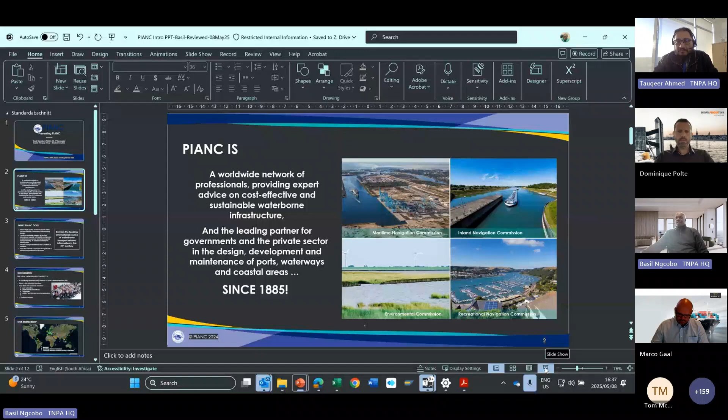There's a slight delay, could just give me a second there. Not a problem. Okay, just to switch that, switch the screens there, Basil. Getting there, Tauqeer. Okay, sure. This machine is not as efficient as it should be. Almost there, no worries. Let me just put my camera. Looks like you need to install a new fender there, Basil. Almost there, just it's coming.

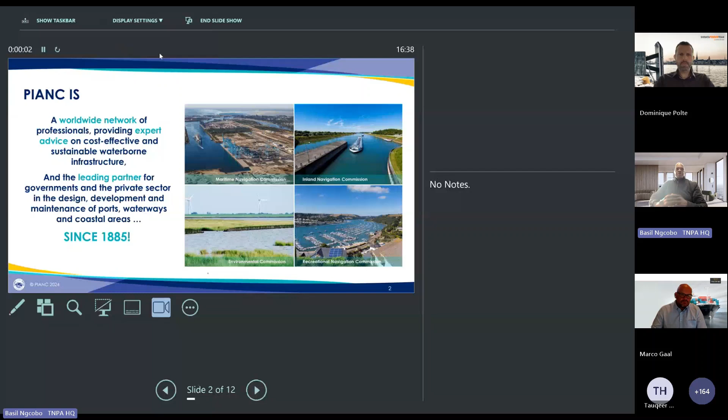All right, Tauqeer, shout if it's good to go. Yeah, okay, now we can see it. You good to go, Basil? It's just stalling on my side. Tauqeer, just give it another second or two. Okay. All right, colleagues, I'm going to start so long, hopefully this is going to catch up as we go along, because really it's stalling right now. I'm not sure, Tauqeer, if we should check the option of maybe projecting from your side, because it's pretty much stalled. Let me try on my side. Okay, just hang on. Okay. The movement is quite slow. All right, let's see. All right, okay, there is some movement. Yeah.

Thank you, you might have to come through. Okay, let me share my screen. Let me know if you can see it, Basil. Yep, I can see it, Tauqeer. Okay, yeah, I can go ahead then.

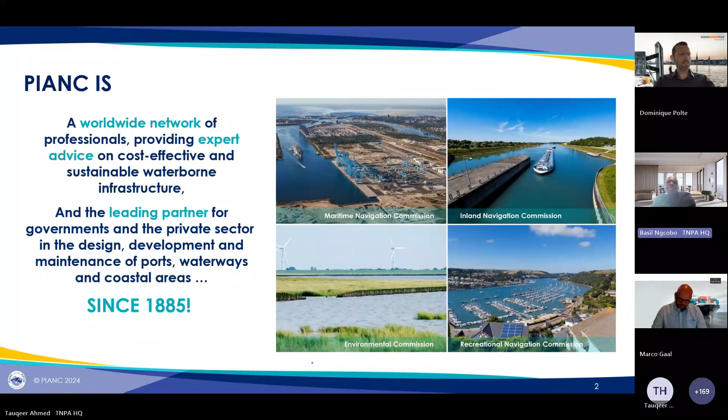So what does PIANC do in essence? They deliver high quality technical reports within the International Commission and working groups. It creates a worldwide network of best international experts, both in public and private sector, on technical, economical, and environmental issues pertaining to waterborne transport. It also supports young professionals and countries in transition - basically aspiring countries that have members but don't have sections. And it keeps the network of experts connected through international, regional, and local events. Let's move on.

So the members of PIANC consist of 43 qualifying members, of which 35 have national sections - we'll explain that now. It has 1,800 individual members and more than 500 corporate members, which includes port authorities, professional associations, universities, and public and private sector organizations. It also has 17 platinum partners, which again we'll explain.

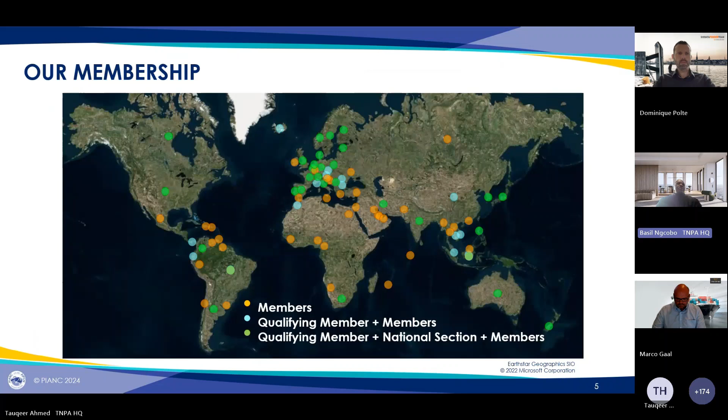Africa still have one national section. We're hoping that in future we'll grow this organization.

So what do you get if you join PIANC? You get connected to experts, guidance, and technical advice, of which today we are navigating some of that work. You gain open access to advanced technological information, address climate change. You team up with decision makers. You become active, if you so choose, on the working groups, commissions and national sections. We bring in the young professional committee or groups into PIANC committee. You become part of that international network.

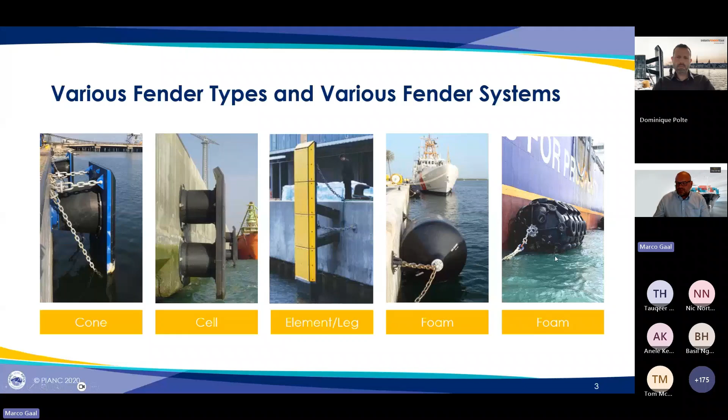And how does a fender work? Very simple. The fender gets compressed, and to compress the fender, that takes a force. The force combined with deflection, as a function, results in the energy.

So we can see two main types of fenders. There's the buckling fender, where you can see the force builds up quite quickly, because it needs to buckle - you need a bit of force to really push this fender into a certain shape, which makes this fender quite energy efficient, a lot of energy with a certain deflection. Then there's another type, cylindrical foam fenders and pneumatic fenders, which we call side-loaded fenders. They don't have that buckling point, so their compression is a little bit more progressive. Here the force versus deflection is almost linear towards the compression, and that gives you the energy.

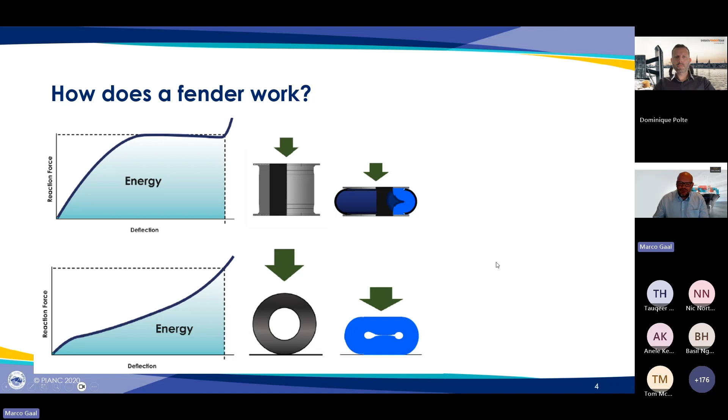So that's in a very short nutshell what a fender is and how it works. I know that's maybe a little bit too much in a snapshot, but for engineers who are new in the business and just getting started with this topic, I'd say just read PIANC 211, chapter 2 - it's an excellent point for getting a little more insight into fenders. So that's to start with. Now the key topic for me in this session is key issues dealing with fenders.

Before we start, I think what you see in modern ports is they face various challenges. One of them is we see an increase in cargo volume. At the same time, ports struggle more and more to grow for various reasons, either budget or spacing, a typical issue you see in a lot of ports in Europe.

Combine that with improved safety awareness, in terms of personal safety, but also port operational safety, and that in combination with congested ports. That's also one of the reasons why you want an efficient port. You can't really afford any downtime. And on top of that, in a lot of ports, more and more also put up tougher environmental regulations.

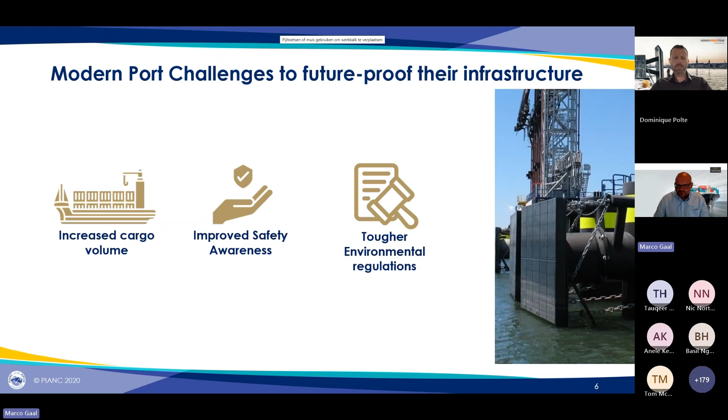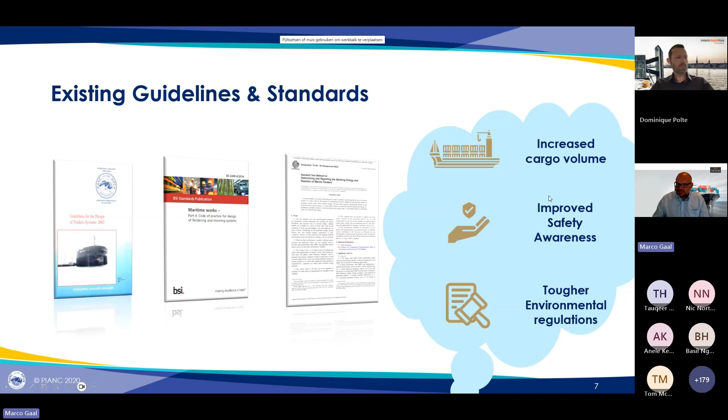Now, if you look at the existing guidelines, there are quite a few, but the main ones are the old PIANC guidelines, the British standard, and there's also a standard for testing. They cover a lot of these aspects. The question is, do they really cover those things that ports require in the future? Are they really addressing points like environmental, the latest safety standards, and so on? I think the conclusion is that they're not.

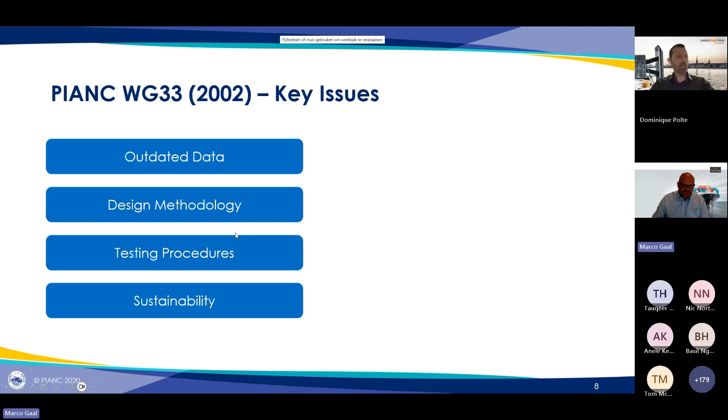But let's zoom into the key issues there. In the old document, we see that there's a lot of outdated data, and I'll zoom into that in more detail. Design methodology is challenging, and I think there needs to be some improvements. Testing procedures might not be really good in the old document, and also sustainability was not covered.

As I said, they don't really align with what a modern port needs. If you look at outdated data, the old document was written in 2002 using data from vessels back then, and back in 2002, vessel sizes were significantly different.

Berthing velocities were based on data from the early 70s, so definitely not really relevant for today's modern shipping. Hull pressure tables were the same style, based on old information, old research.

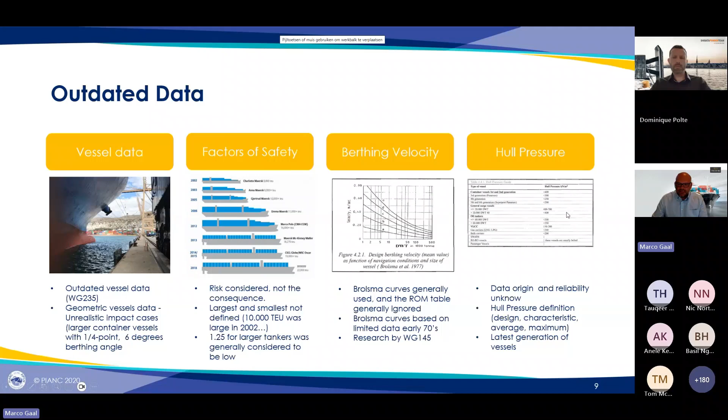If you then look at the design methodology, the old guidelines do not really align with the relevant codes. If you look at Eurocode, ASTM, they speak about characteristic loads, design loads - typically probability-based methods. All the old guidelines do not do such a thing.

If you look at energy calculation, E is still half mv squared. The laws of physics will not change, but some of these insights on the coefficient factors have changed through the years, so that needs to be accommodated.

Performance correction factors - as you probably know, a fender is a rubber product, and a fender has different behavior in very cold temperatures. It becomes more stiff than in hot temperatures, and there are other factors that influence fender performance. The old PIANC guidelines did not really cover that very clearly. Overall fender system design, very important - I think Dominique will speak a little bit more about that too - was not really well addressed in old guidelines.

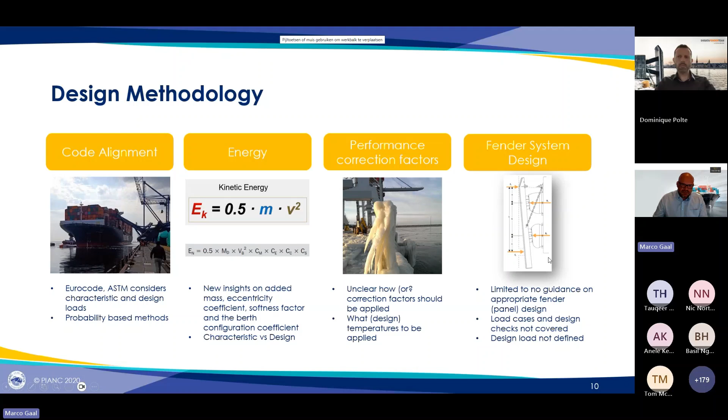That paper showed that 60% of the fenders they tested in an independent laboratory passed requirements - or in other words, 40% of the fenders had testing issues, either fenders not complying or the testing guidelines being misunderstood. So clearly something needs to be done.

The old guidelines' procedures were not clear. There were issues relating to traceability of the fender. So if you produce a fender and test a compound, how can you be sure that high quality compound is actually used in your fender, and how can you be sure that's the compound used for your published catalog value?

So all of that needs to be interlinked. Old guidelines had no requirements on physical properties, or very limited, so the new guidelines introduced that in greater depth.

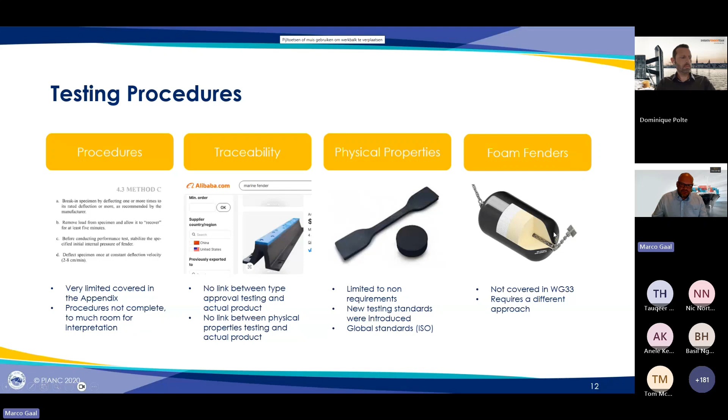In the old guidelines, also foam fenders were not really well addressed.

And sustainability, it's quite obvious how that evolved in the last few years, whereas when the PIANC guidelines were published in 2002, clearly that was not a main topic. So obviously the world has changed in the mindset, including the development of the United Nations sustainability goals.

PIANC made this a key task in their organization, and that's why we see this coming back in papers, in reports like the fenders. At the same time, the industry has various challenges to do.

Rubber is hard to recycle. The use of recycled rubber is therefore a challenge - rubber is difficult to recycle, but also use of recycled rubber is still a challenge in the industry, and will be a challenge for many years to come.

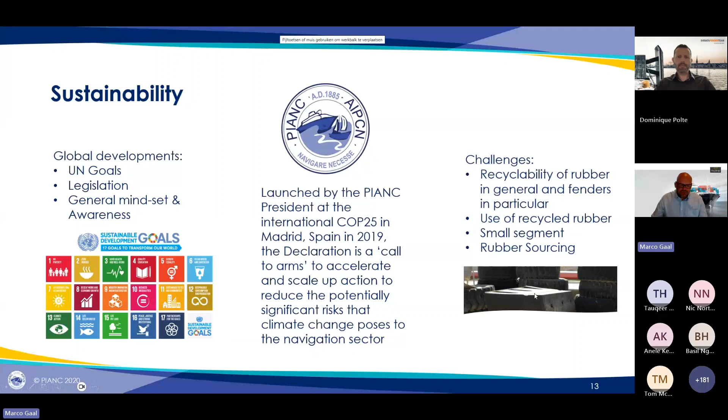But also looking at small segment rubber fenders, which doesn't make it very interesting for the recycling industry to invest in. Rubber sourcing is challenging too, because it's partly a synthetic product. So lots of challenges there too that needs to be addressed.

So that's in a very short, quick introduction on the key challenges that we see with the old guidelines.

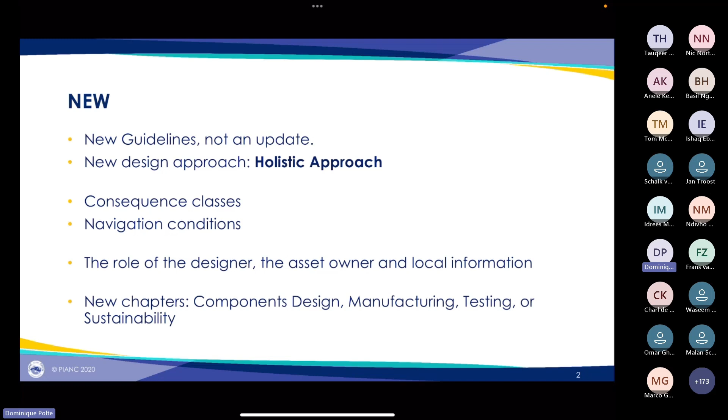We have dedicated chapters for component design, manufacturing, testing, and sustainability. Before, testing was just an appendix of the old guidelines, and we put all the important topics into different chapters to make sure they're all addressed correctly, because the design is so important for the life cycle and operation of the fender system, and the new guidelines address that pretty much.

So local information is key. If you don't have the local information, it leads to quite conservative designs with the new guidelines. Be aware that from a general point of view, the fender system will rather get bigger than smaller, unless you have detailed data in terms of berthing speeds, bow radius, the variety of ships, and multiple fender contact. Otherwise you end up with larger fenders, so make sure your database is correct and is not leading to too conservative designs.

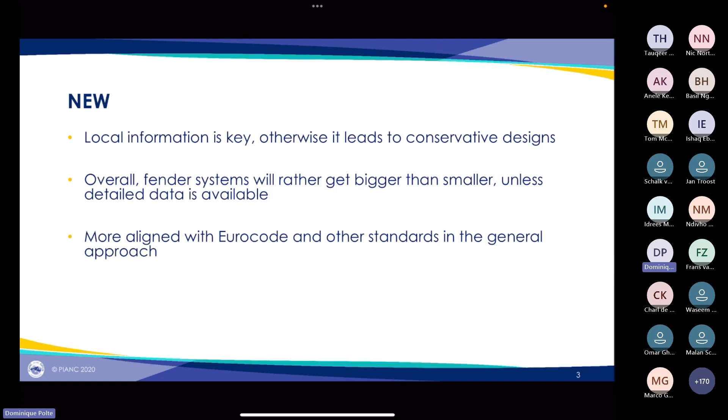The general approach is more aligned to Eurocodes and other building standards, with a probabilistic approach. So if you're familiar with Eurocode or other standards which are probability based, it will be easier to get into these guidelines. Next to PIANC, there's also the British standard, 6349, which is being updated.

Especially in English-speaking or British-educated countries, the British standard is pretty dominant, and you have to be careful if you mix standards—this happens in specifications, where you can't cherry pick, using the advantage of PIANC and the good thing of the British standard. That doesn't work, it's not mix and match. You have to decide which way to go as a design basis, because they have differences and the outcome could be quite different if you try to mix or combine them.

Finally, for existing structures, the new guidelines have to be modified, because the design approach is based on new structures. For existing structures, you might have to modify your approach in terms of correction factors, safety factors, and so on, because you can't change your substructure. If you calculate your fender system and certain forces that need to anchor into the substructure, for an existing structure you can't really upgrade it.

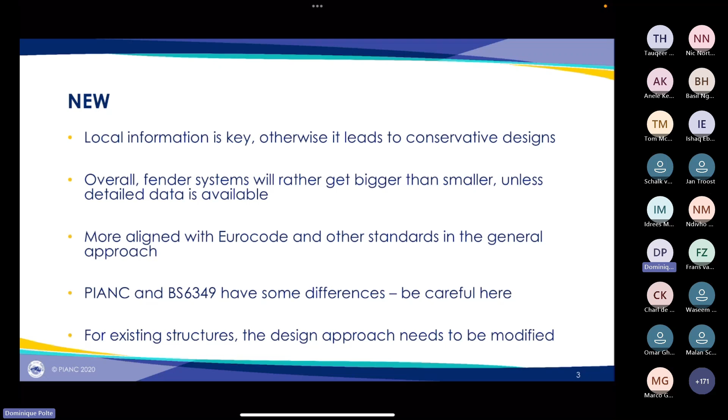With that, we are getting into fender system design and selection, and I'll get into these new aspects a little down the road. We start with an overview of the typical fender problems we're seeing in the market, what you might have seen, and then discuss how the new guidelines address these problems.

Leading the way into new guidelines, with the typical problems we saw in the market, now being addressed with the new guidelines, which is a big step forward. These guidelines are a massive improvement, but it's very important to use them correctly and to use the right data.

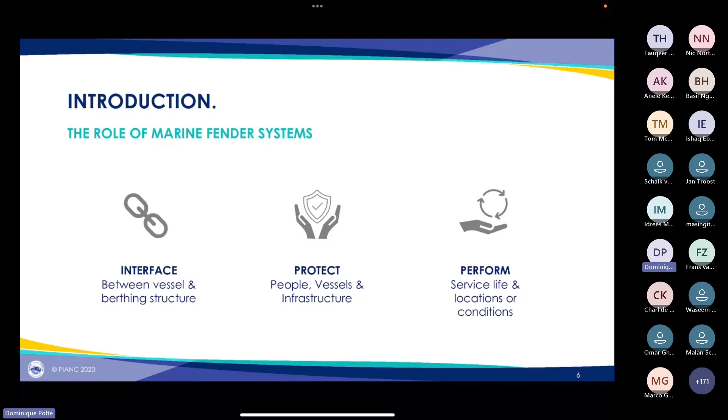In general, the role of a fender system—we addressed it already a little bit—is the interface between the vessel and the berthing structure. It should protect vessel structures and people, and you want to make sure the fender system performs over the life cycle. That doesn't mean a fender system cannot fail, so that's something to be aware of.

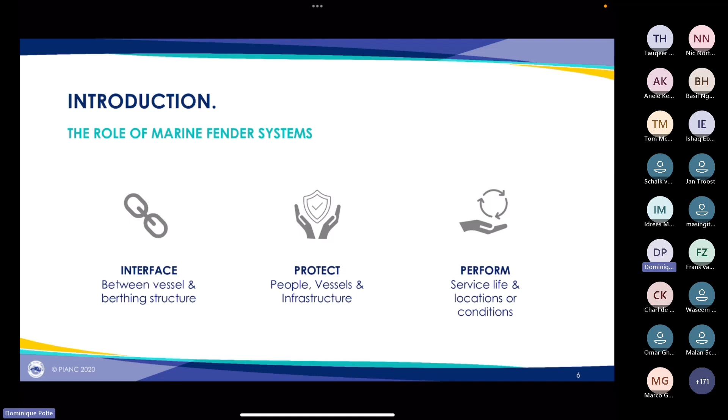If a ship comes in at a higher speed or whatever, and the fender system fails or breaks, but the ship is fine and the substructure is fine, then the fender did its job. A fender is also kind of a fuse—you want to make sure the ship and people on it are fine, the substructure is fine, and the fender failing is absolutely fine. There's no problem with that, because it's safety equipment, and it should avoid more damage if a vessel comes in under uncontrolled conditions, higher speeds, and so forth.

So what are the typical problems of a fender system? We have a sole focus on the rubber unit only.

That's a problem, because a lot of specifications focus on the rubber and talk a lot about testing and these kinds of things, but not addressing load cases, positioning of the rubber unit, chain angles, and so on. Just the positioning of the rubber unit on the panel makes a huge difference for the performance of the fender system and also the life cycle.

This whole fender design is not rocket science, but there are certain very simple things that make or break a fender system. The same with the weight chains. If you have incorrect weight chain designs with incorrect angles, your fender system is going to fail just because of design issues. And the same applies to the steel panel.

If your steel panel is not designed for the right load cases, the fender system can fail, or the life cycle is reduced substantially. This is what we call the holistic approach, which was also adopted by PIANC, because you have to look at the fender system as a whole, not only the fender - you have to look beyond the fender. The substructure is also important, because if you need certain chain angles and there's no substructure to anchor these chains, then you have a problem.

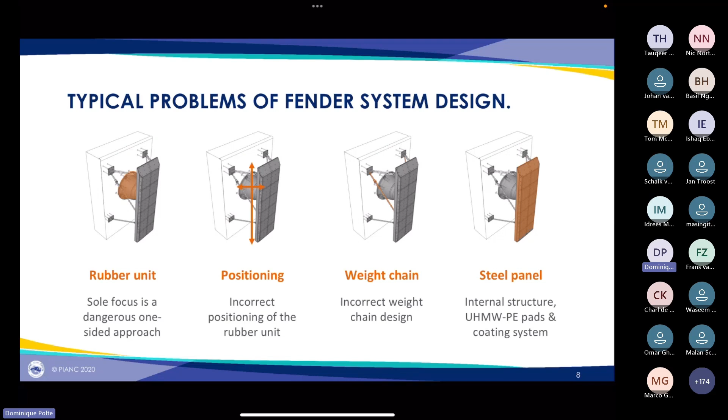Just a couple of examples here. In this project, the positioning of the rubber unit is a problem. You can see that the panel is already tilting under its own weight. The weight chain has slack and also has the wrong angle.

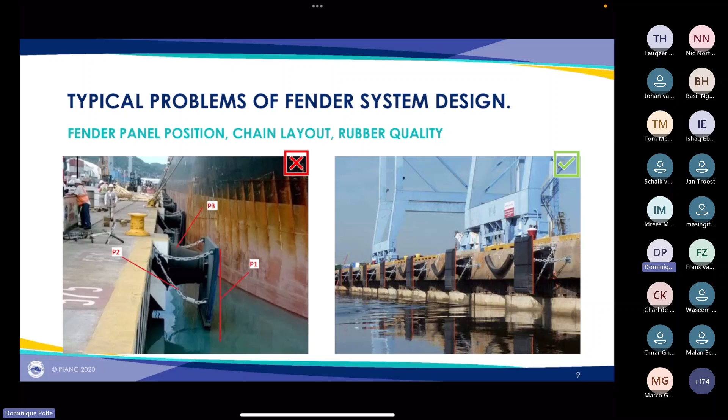If you look at that system on a drawing, it might look fine to the untrained eye. But later, once the system is in operation, you see all these problems. Compare that to a well-designed system with the correct chain angles and positioning of the rubber units in the center of the panel, and so forth. The same applies to the internals.

If you have a steel panel which is not designed correctly for the load cases, you will end up with a bent or destroyed panel. So you want to make sure that your steel panel is designed correctly to be able to deal with the loads and load cases applied to the fender system over its lifetime.

And then, of course, there's the design approach where you look at fender systems in service for like 6 months and they are failing, compared to systems in operation for 10 years that are absolutely fine under very similar conditions. Those are design issues, because the initial fender, like on the left side, is a great quality product. But the design and the application is the problem.

So that's what I said earlier - you can have the best rubber unit or the best fender, but if your design is wrong, or not all of the requirements are considered, fender systems are failing. And so therefore it's so important to consider all these aspects.

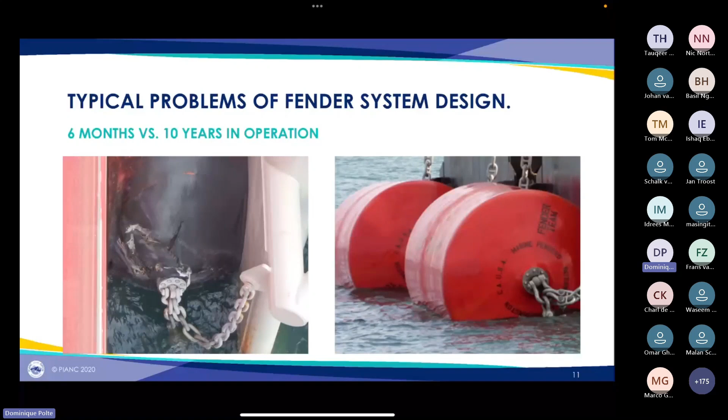The same applies with installation of fenders where you have conical fenders. Sometimes they're installed inverted. Now the new PIANC addresses that issue and makes clear that there is only one standard orientation, which is installing the fender with the wide flange to the substructure.

Because if you invert the fender, you have a much larger cantilever, you have higher stresses in a smaller area, and the typical failure mode is cracks in the head section of the rubber unit. This is something we see on a regular basis, and it's something to avoid, to make sure this is addressed so you don't have these issues down the road.

And therefore, the new PIANC is also addressing that, educating people on what the standard orientation is.

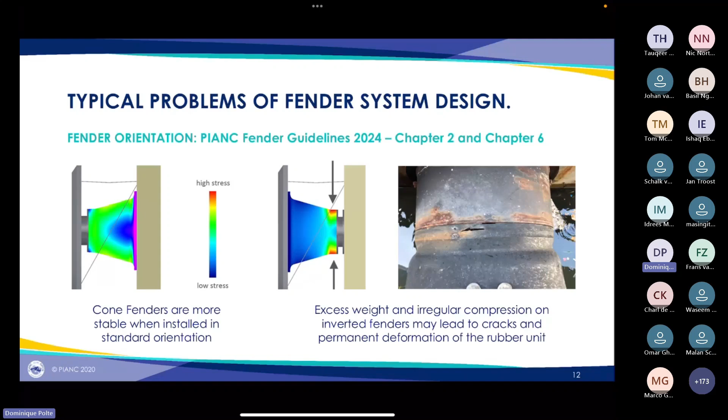And that's not what a fender is designed for. So the fender is failing. There's no other way that the fender will withstand these forces. So it's a good example that you can have a high quality product that could fail just because of design issues, because these cyclic loads were present and not considered in the design of the fender system, and then fenders are failing.

So therefore, we have chapter 7 addressing these issues, and the goal with cyclic loads is to reduce the deflection of the fender to like 5 to 10%. And that makes a huge difference.

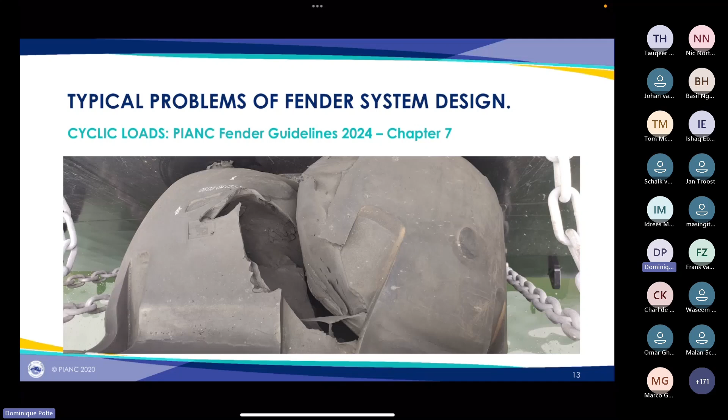This fender, as I said, was deflected to the maximum several times during minutes, and they're just not designed for that. So when it comes to cyclic loads, you have to pay even more attention to what is important and what needs to be addressed in the design of the fender systems. As I said, the guideline says you want to limit your deflection to like 5 to 10%. This fender was deflected 70%, several times per minute.

So all of that is to avoid costly consequences, and you want to make sure that you look at the project conditions, the components, and their design and manufacturing, because only all of that together combined provides you a reliable fender system, really following the holistic approach, which is recognized by PIANC and the new guidelines.

So in terms of the project conditions, as I mentioned earlier, there's so much more than just a rubber unit. There are different rubber units you can use, because the most efficient fender might not be the most suitable fender. And that's something we see on a regular basis, that you might use a less efficient fender, but it's most suitable for your application.

You have to look into your location, the materials, the vessels, and so forth, to make sure you have this holistic approach and really address all the different project conditions.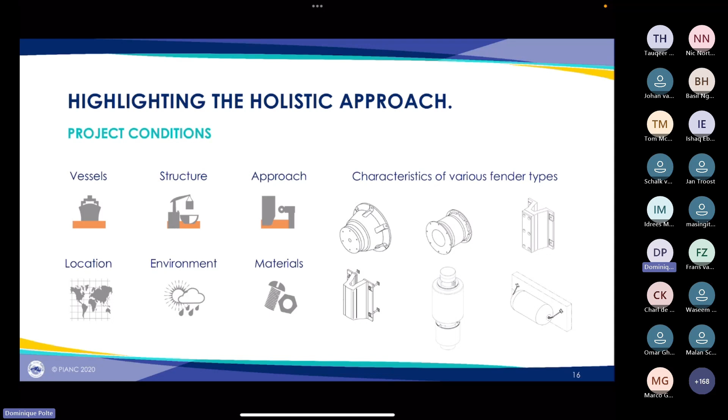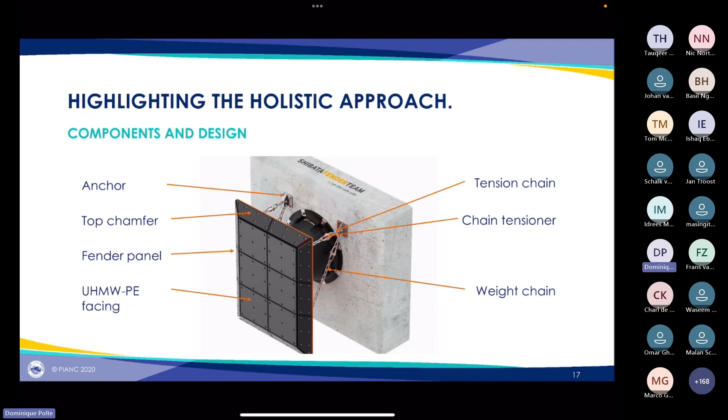When it comes to the components and the designs, we addressed that already a little bit. This is just an overview of all the different components of a fender design and a fender system. And all of these have to be designed correctly and in connection and cooperation with each other, because otherwise they don't work.

And then also the manufacturing. You want to make sure you have a high quality product with high quality raw materials. However, as I said before, a high quality rubber unit doesn't make a good fender system, and vice versa. You can have a high quality rubber unit with a bad design, and the fender is failing. You can have a low quality fender system with a good design, and the fender is also failing. So focusing on certain components alone will guide you in the wrong direction.

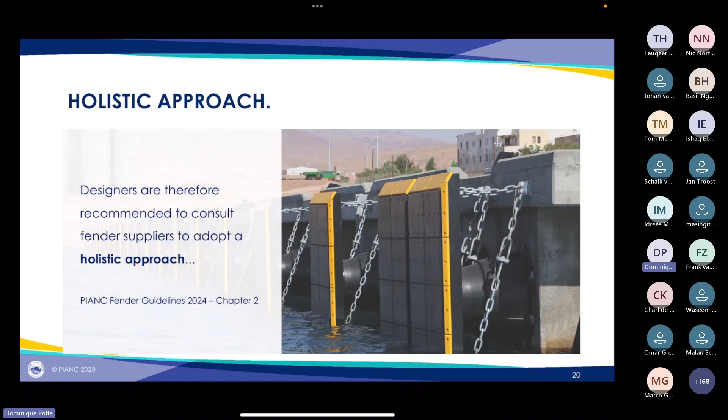So how are the new guidelines addressing this? In chapter 2, they used the word holistic approach. We've been advocating for that for years now, using a holistic approach, and PIANC recognized that. Looking at chapters 5 and 6, those are almost the most important chapters for designers, because in chapter 5 the berthing energy is discussed and shown, and how to calculate it, and then in chapter 6, the fender design and selection. So they are really key chapters. The other chapters are important aspects and support chapters, but your work really starts in chapter 5 and 6.

What I mentioned earlier, the new part is the navigation conditions. So you look at your terminal and your port, and then you have to decide, based on this table, what are the navigation conditions: favorable, unfavorable, or moderate conditions? And that's something only the designer and the asset owner can decide. The fender manufacturer, they don't know, because you know your port best, and the decision about navigation conditions could also change within your port.

So if you have a port at the mouth of a river, the most exposed terminals might have very different navigation conditions than those further inland or upstream. So also within a port, things can change: navigation conditions, and also consequence classes, which is in chapter 4, change by port, by terminal, and also by what kind of vessel you have, and all these kinds of things.

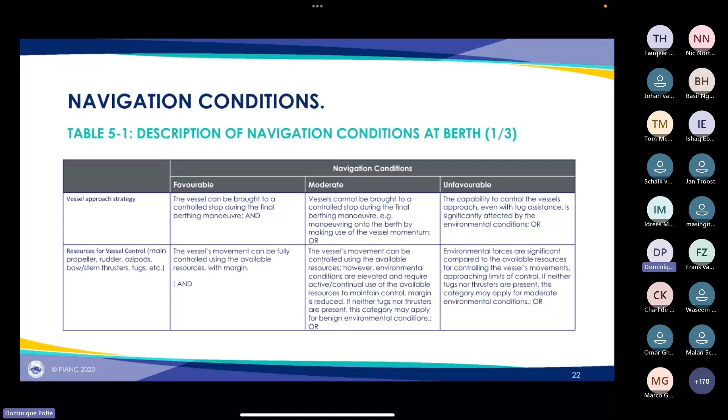There are several aspects being addressed, also currents and waves. So everything has to be considered, and then make a well-educated guess or decision about the navigation conditions, and then from there you proceed along the design flow in order to address each component and also each aspect of the design.

If we look at the kinetic energy, the general approach hasn't really changed. We still have the laws of physics here with half the mass times velocity squared. In the new guidelines, we took out two factors, the softness factor and the berth configuration factor, because we realize the impact is very, very low, and in addition, in almost all designs, designers determine these factors to be 1.

So we took them out, and instead of the abnormal berthing factor or the safety factor, we added the partial energy factor. So the partial energy factor is the new safety factor, and with it you can really fine-tune your safety factor for your particular terminal range of vessels and so forth. However, the berthing velocity is still the dominant parameter.

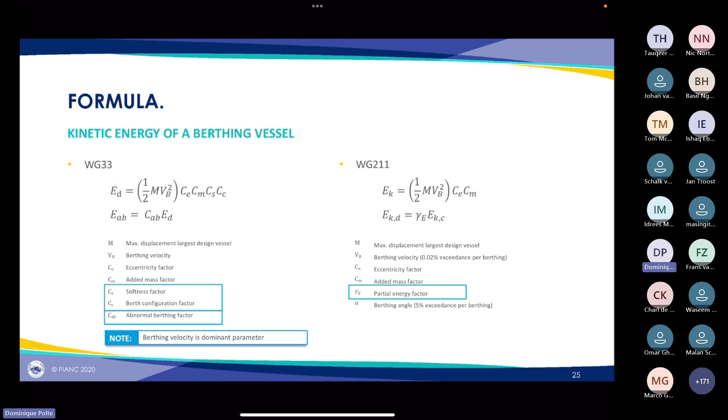And that's why determining berthing velocity is so important. If you have the local data, use them. If you don't, and we also recognize the real world, because in the majority of ports, I would say 90+%, they don't know what the berthing velocity is. So what I mentioned earlier, if you have local data, use them as much as you can. But if you don't have the data, on the one hand, you have these tables here.

With guidelines on the velocity. What you also could do is, if you have an existing terminal which is designed on, let's say, 100 millimeters per second, and that works fine, then there's no need to increase the speed, because then experience also becomes local knowledge. Even if you don't know the exact speed of your vessels, you still know that with that assumption, everything works fine, so we just continue with that.

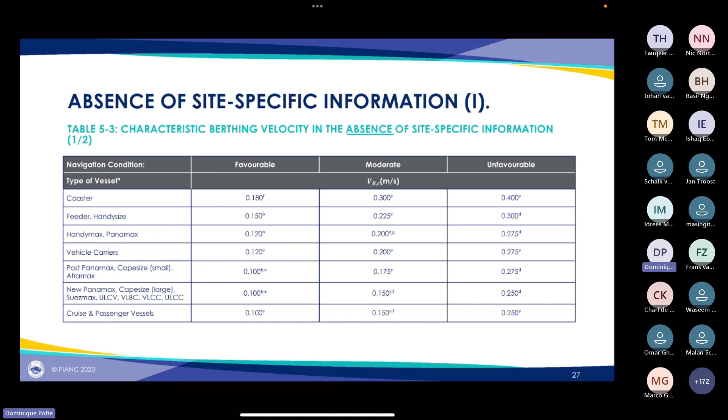Here in the table, you can also see why the navigation conditions are important, because changing from favorable to unfavorable could double your berthing speed used for your design, which has a massive impact on the fender and fender size down the road.

Couple of highlights here. The berthing velocity has to be provided by the asset owner, because nobody else knows except the asset owner or the port. The minimum berthing velocity is 0.1. Before it was 0.08, so you already have like a 20% increase in berthing velocity here, which might make the fender bigger in the end.

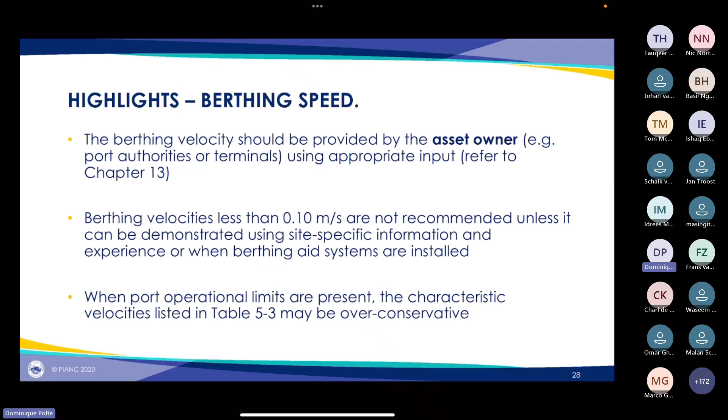And then, of course, if you have certain operational limits, the velocity in the table might be too conservative. So again, if you have local data, use that.

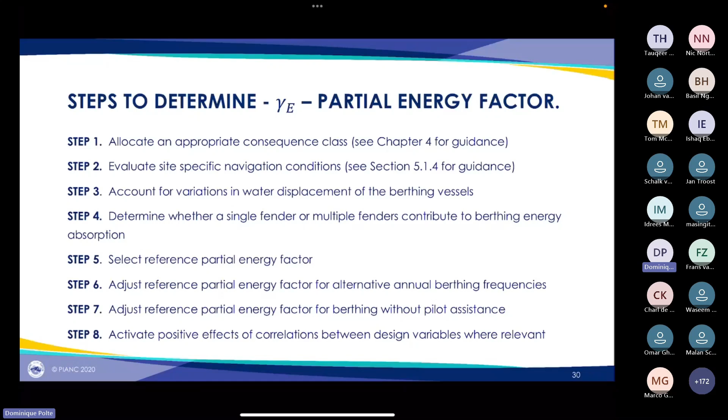When it comes to the partial safety factor, that accounts for uncertainty in the berthing energy, and there are fine-tuning options to correct for annual berthing frequency, pilot assistance, variation in the design or design displacement, and so forth. So there are 8 steps, and I don't want to get into all of them because we're running a little bit of time here, but you get 8 steps basically to follow in the guidelines in order to determine your partial energy factor and fine-tune that factor to your particular project.

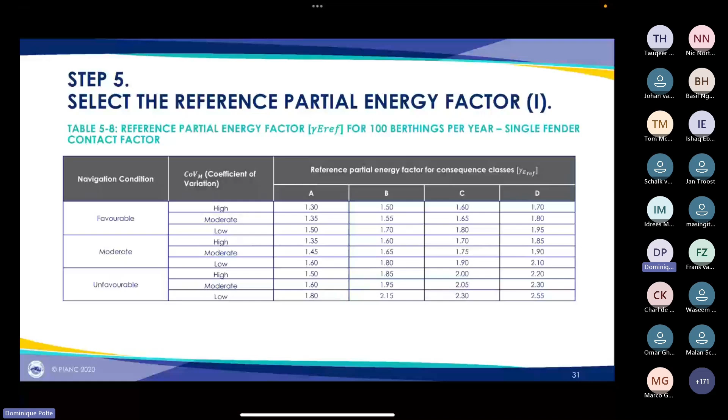Then for this partial energy factor, we got a table here where we can also see the impact again of the navigation conditions and the consequence classes. So we have consequence class A, B, C, and D, and the navigation conditions, and the combination of that. You can also see that the velocity, the correction factor, and the safety factor changes substantially within these consequence classes and navigation conditions.

If we apply the new guidelines in 211 and the minimum speed of the new guidelines, we are already at 2,500, so we have another increase of 20+% on the berthing energy. And if we apply the new guidelines with reduced speed, with the speed we used before, then we had like 1,600, which is again about 1,000 kilonewton meter less. But this shows the impact of berthing velocity. It has a massive impact on your results, and therefore it's so important to make sure your berthing velocity is right and you use the right data.

Quick conclusion: we require more input, or the designer requires more input, to prepare an energy calculation based on the new guidelines, and much more. We need to allocate more time than in the previous working groups or previous guidelines. We can consider multiple fender contact to reduce design energy, but you need a lot of data to do that, and site-specific information is really needed, getting them from the asset owner, who has to be involved from day one.

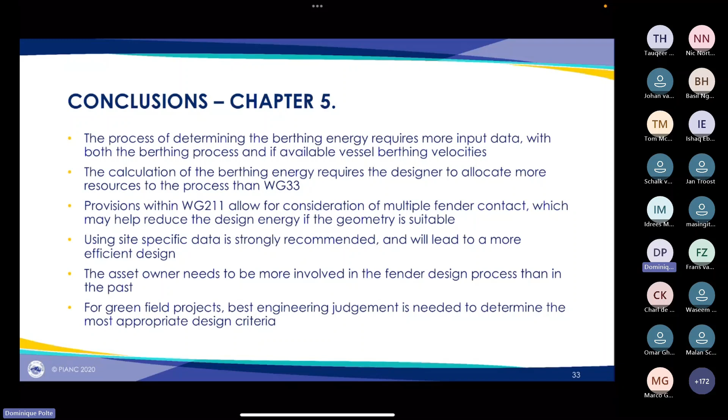And for greenfield projects, use your best engineering judgment. That's what it is there. Chapter 6, pretty quick here, about timing.

The old working group had certain terms being used, like CV values. This is now the base performance. The CV values plus correction factors is the characteristic performance, and the abnormal energy is now the design performance, and the RPD is now preset conditions. So this is also something to consider for specifications, that the terms have also changed and need to be updated accordingly.

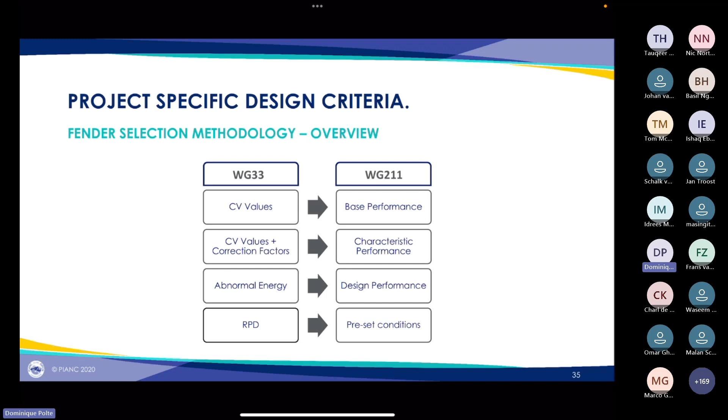What we introduced are the preset conditions, because if you don't have enough data, you could also design a fender system with the preset conditions. In the manufacturer's catalogs, there will be two tables, one for the base performance and one for the preset conditions. And with these preset conditions, you cover 90% of projects.

Because the temperature ranges are covered, the angles are covered, the speeds, that puts you on the right track there. If you don't have data, you can use these preset conditions and preset values for a relatively safe and conservative approach.

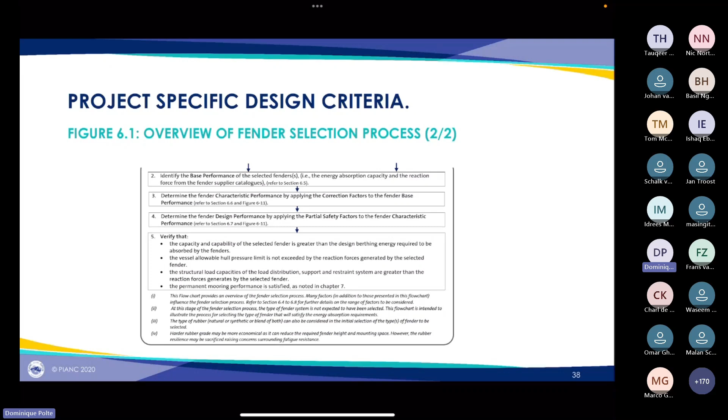So the overall selection process, as we said before, you have to look at all your different conditions: site conditions, operational conditions, berthing speeds, rubber grades, average temperatures—all these kinds of things you have to consider, and that goes into the selection process. We will see that in one of the next overviews here, which gives a clearer picture.

So the factors influencing the fender system: the bow radius, bow flare, vessel belting, do I have flexible dolphins, how many fenders do I have, is it ship-to-ship fendering? There's so much that goes into that, which we already mentioned before.

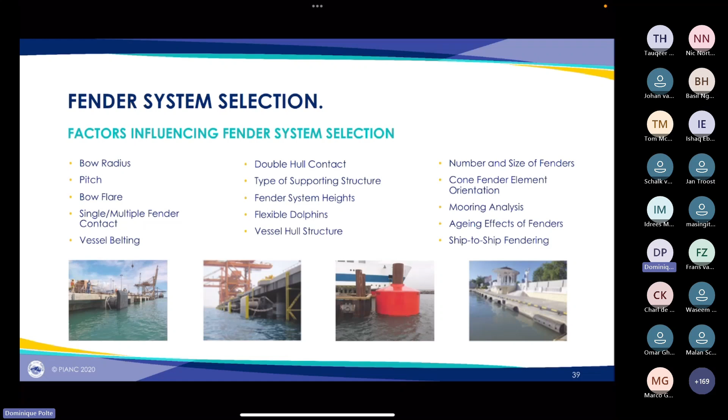So in the selection process, basically what you do is, based on your berthing energy, you select an initial fender and apply the correction factors for velocity, temperature, angle, multiple fender contact. All of these are applied accordingly. That gets you the characteristic energy. Then further, to the characteristic energy you add your safety factors, and then you get to your design energy—we get to that in a second here.

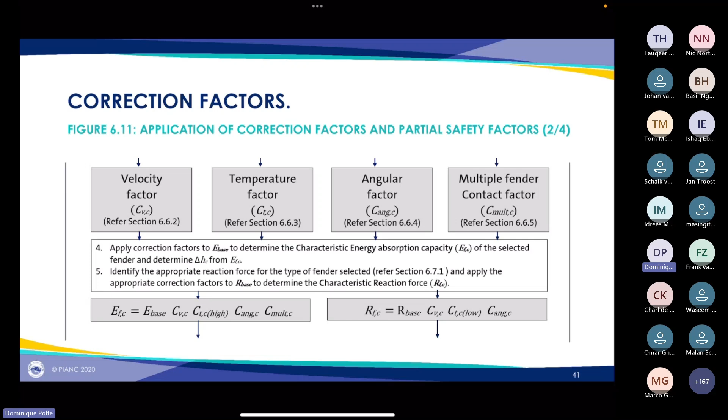Just want to give you a brief reminder about velocity correction factors. We have the velocity factor: basically rubber is a viscoelastic material, so if you compress it faster, it's stiffer. That's why you have to bump up the performance curve here with these velocity factors.

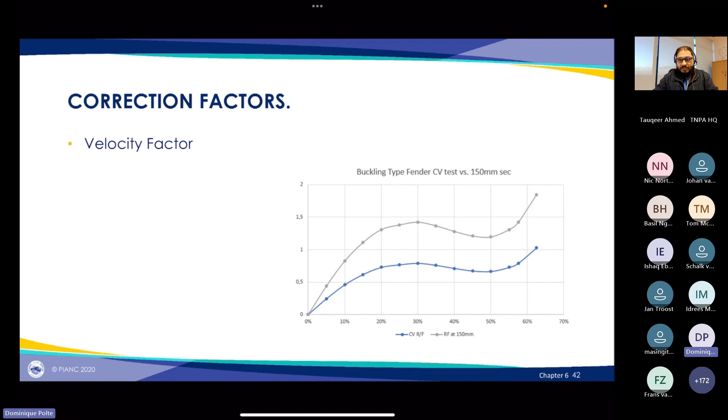The temperature factor: the fender behaves differently in cold or warm climates. And the angular factor is basically looking at the center line deflection. If your center line deflection is not 100%, you don't get 100% of the energy. That means less energy under angular compression.

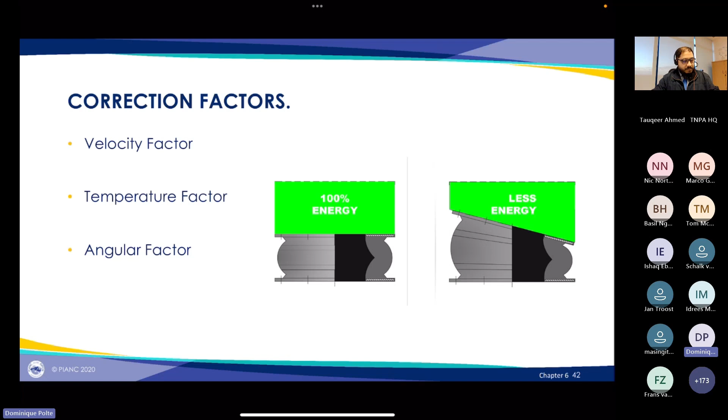And then the multiple fender contact: if you contact multiple fenders, then of course your energy is spread over more than one fender, which could also reduce the size of the fenders. But you have to make sure you have all your vessel data and everything to determine if that case is really happening and how much energy the adjacent fender will provide.

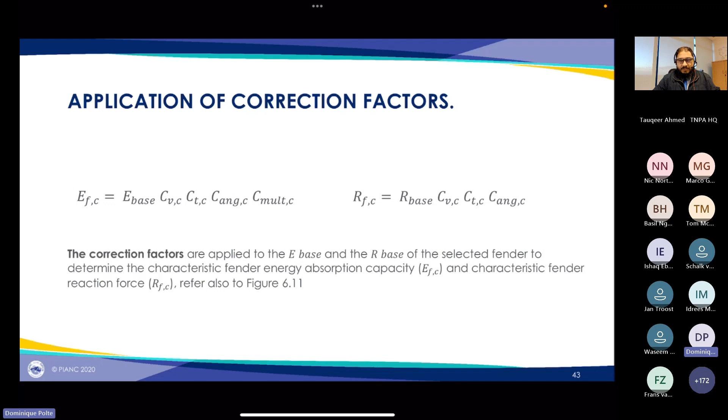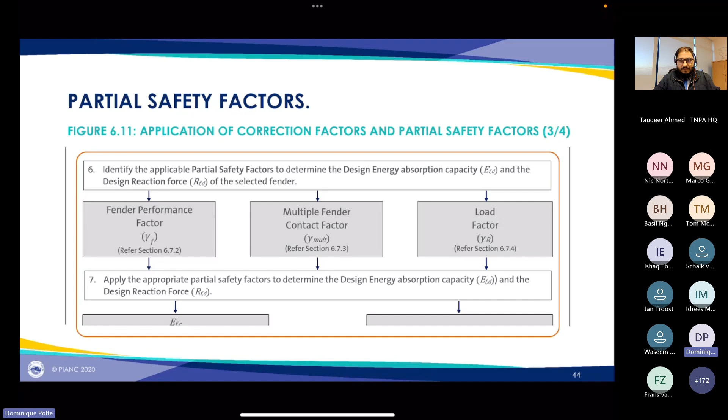So after doing all of that, you apply these correction factors to the base performance, and you get your characteristic energy absorption. The next step is to get from the characteristic to the design energy: you apply your partial safety factors, which is the fender performance factor—that's basically the tolerance—multiple fender contact, if more than one fender is in contact with the vessel, and the load factor that's applied on the panel side. So applying that as a safety factor determines the size of the panel, the hull pressure, the chains, and so forth. This is something also new in the new guidelines, this load factor on the panel.

And also in combination with the consequence class, so if you decide for consequence class B, you have 40% more load, right there, compared to the old guidelines. That's why I said in the beginning, overall fender systems are rather getting bigger than smaller.

So, based on that, you get your design reaction force and your design energy. The design reaction force has to be less than the load capacity of the panel, and on the energy side, your design energy has to be more than the kinetic energy of the vessel to make sure your fender is designed correctly.

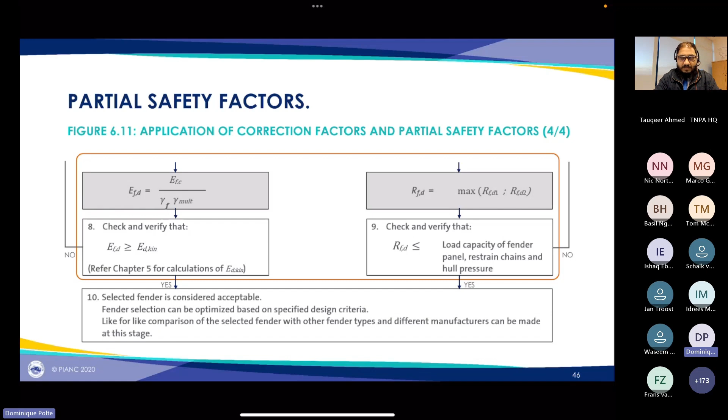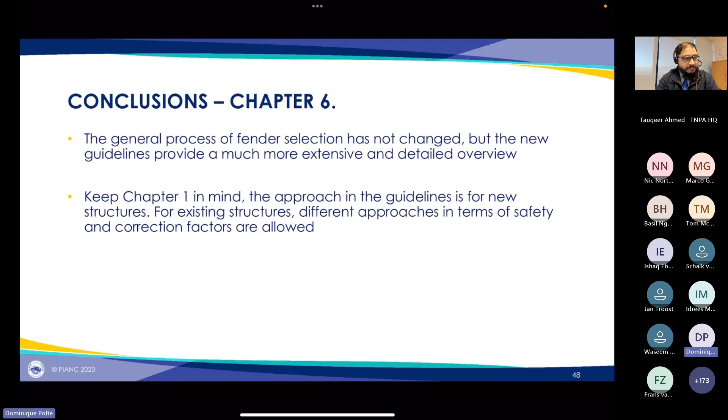That's just an overview about the different formulas, but let me skip to the end here time-wise. So the general process hasn't really changed, but the approach needs more time and more detailed information. In chapter 1, as I said before, the guidelines are for new structures, for existing structures you may need a different approach. The preset conditions provide a good start and cover most jobs worldwide if you don't have data.

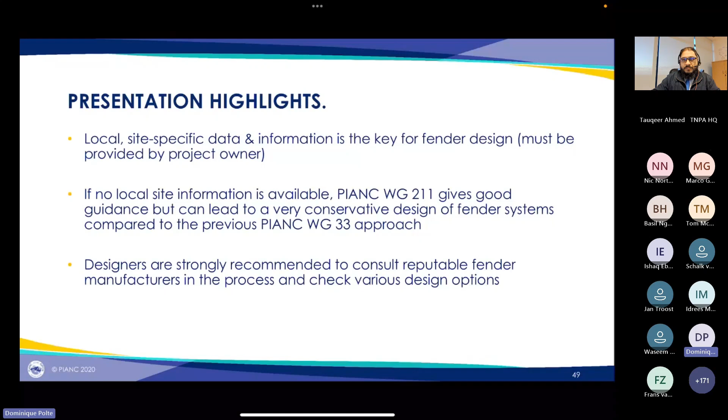The local data and information is really key for the fender design. If you don't have data, you might get too conservative designs—that's also something to keep in mind. Designers are strongly recommended to talk to fender manufacturers, supporting them in their design process. But on the other hand, the designer and asset owner have to provide the needed information, applying a holistic approach.

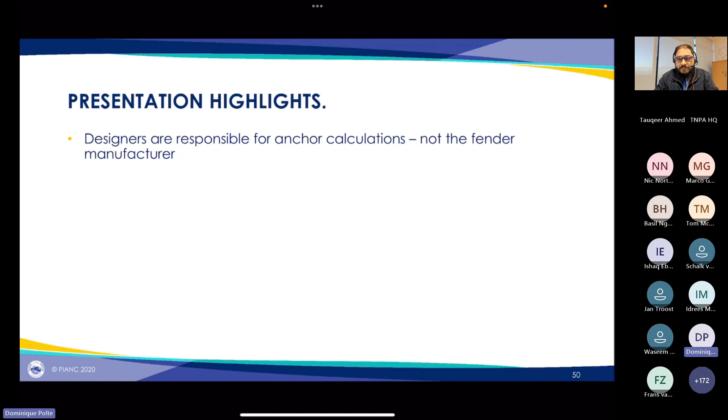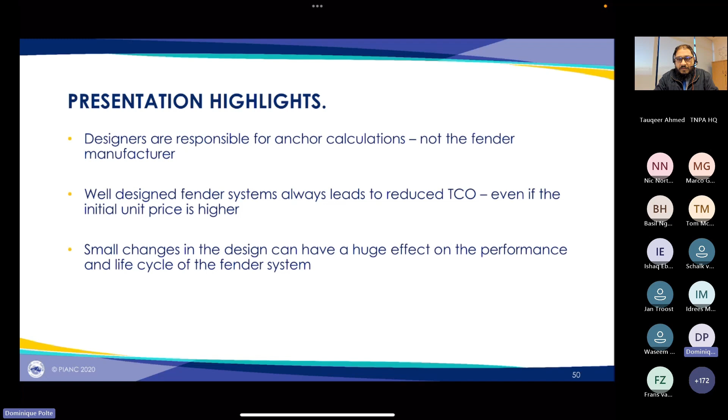The designers are responsible for the anchor calculation, so for the anchorage in the concrete, like the chain brackets and so forth. Overall, a good fender design system leads to a reduced total cost of ownership, and as I said before, small changes can have a major impact on the performance.

And with that, I'm at the end. I overran my time a little bit, sorry for that. No, thanks for that, Dominique.

You know, I just realized—earlier on I said I'm going to put up my hand just to indicate your time is up, but I realize you are presenting, you probably won't see me, but it's fine. It's true, I was looking at the timing, and yeah.

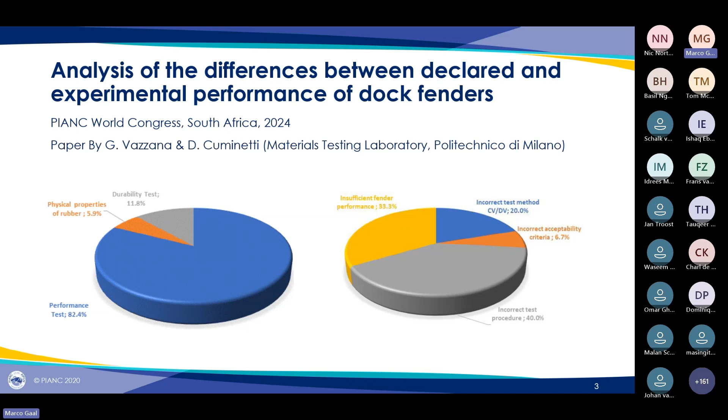Chapter 10 in 211 is all about testing of marine fenders, and that chapter introduces strongly improved coverage. On the top level, it has detailed procedures on performance and durability testing. It covers rubber material testing and all sorts of test protocols. It now also includes foam fender testing that was ignored in previous guidelines. Ultra high molecular PE is covered, and even steel is covered, but steel is quite limited because there are already perfect guidelines and standards for steel. This is more focused on the application of fender panels, so the pressure test is described there.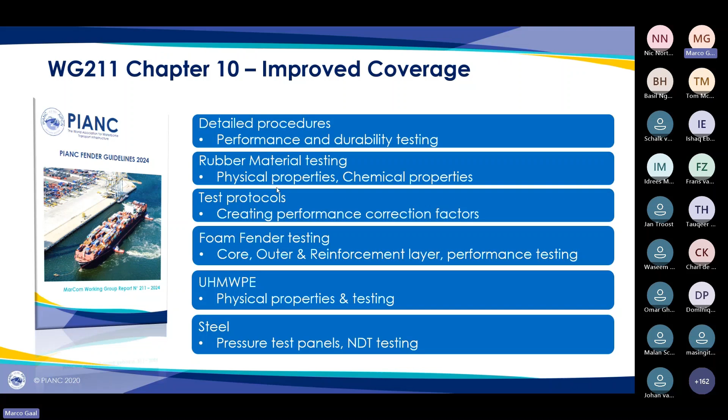I'm not going to zoom in on everything because we only have a short amount of time today. We're focusing on rubber fenders for now.

PIANC guidelines introduce three types of testing. Firstly, there's fundamental testing. Next is type approval testing, and last but not least, verification testing. I'm going to explain all these in a minute in more detail, but all of that is supported with improved testing protocols and testing requirements.

Let's start with fundamental testing. Fundamental testing is, in essence, testing to establish our catalog data. So we, Trelleborg, and other manufacturers have a catalog with data, and to establish that data, PIANC provides guidelines on how we should establish it. So within fundamental testing, we establish the data for our brochure.

In accordance with PIANC, we should now do the base performance test. We should create our performance correction factors. We need to do a durability test on that fender. We need to link that with chemical composition, and we need to verify the physical properties on that.

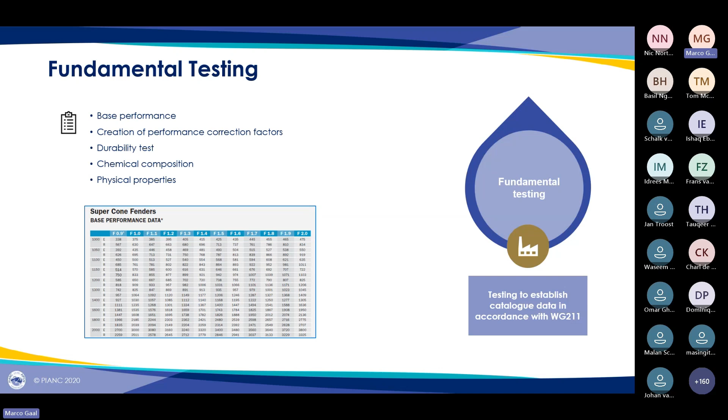The chemical composition is something new. It's a traceability test that ensures the chemical composition of the fenders that we publish is also the fender chemical composition that you can find on the fenders you've been supplied with. And that ensures there is a link between the fender that you buy and the fender that we have been publishing in the catalog.

Another level of that is type approval testing. In essence, it's quite similar to fundamental testing — the procedure and the testing are the same. But once we have a new catalog established with all this data, we can go to a third party and ask them to verify that what we've been publishing is in accordance with the guidelines and is reliable. So this is an independent verification of whatever we publish in the catalog.

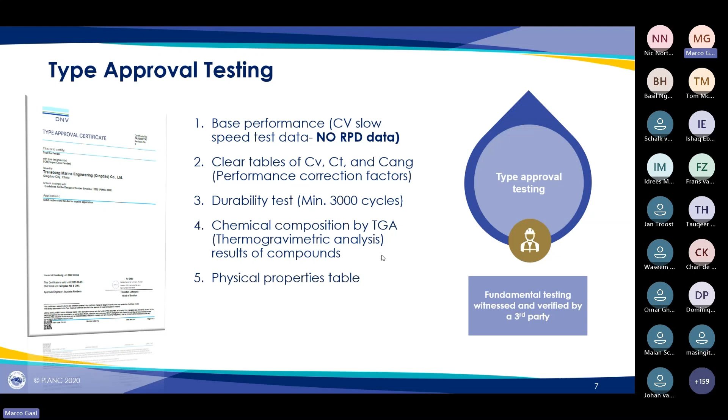Last but not least, that is verification testing. I think for most of the audience here, verification is the most tangible one, and probably the one you bump into most, because the other two parts, fundamental and type approval testing, are something we do as a manufacturer — all you can do is eventually ask for the evidence of type approval testing. But for projects, if you buy fender systems that are being tested, then verification testing is the key chapter.

Verification consists of three parts, or three types of verification testing. PIANC suggests mandatory testing, PIANC suggests highly recommended testing, and PIANC suggests optional testing. I'll cover these in a minute, and I think for you as the audience, understanding these three is kind of important.

Firstly, this mandatory test. PIANC suggests there's a minimum level of testing that we should do. A mandatory test is where the manufacturer does the verification of the base performance. So we test our own fenders and issue a test report with that, and additionally we do a physical properties test.

Obviously, the disadvantage here is that you need to rely totally on the reliability of the manufacturer. In this case, the manufacturer checks his own product, and there's a conflict of interest — the manufacturer might not be the most independent person to verify their own product. Also, the physical properties are tested on a rubber compound, but how can you ensure that compound is actually really being used for your fender?

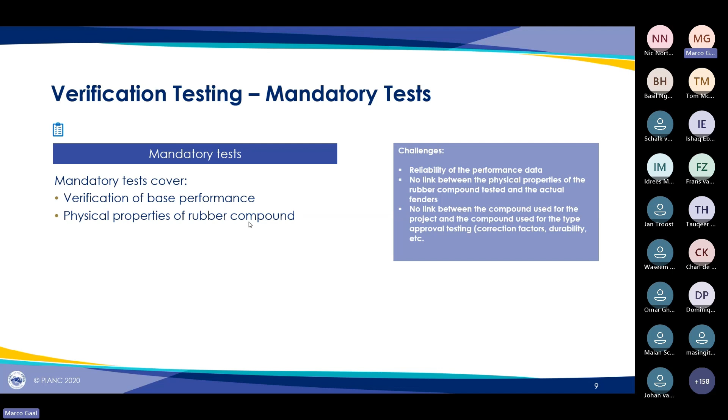So this is really the bare minimum of testing, but I would strongly advise end users and designers to consider highly recommended testing — PIANC calls it highly recommended for a clear reason. Highly recommended tests cover performance and physical properties testing witnessed by a third party, either with a third party witnessing, a third party testing jig, or at a third party testing facility. Also, chemical composition is suggested to be part of highly recommended testing, and what that means I explained briefly earlier.

The chemical composition test is a traceability test that links the fender you've bought from and the chemical composition - sort of the DNA of that fender - to the DNA used for type approval testing, and also the same DNA of the samples used for physical properties testing. This is an important addition to ensure the performance results of the fender being tested truly meet the requirements.

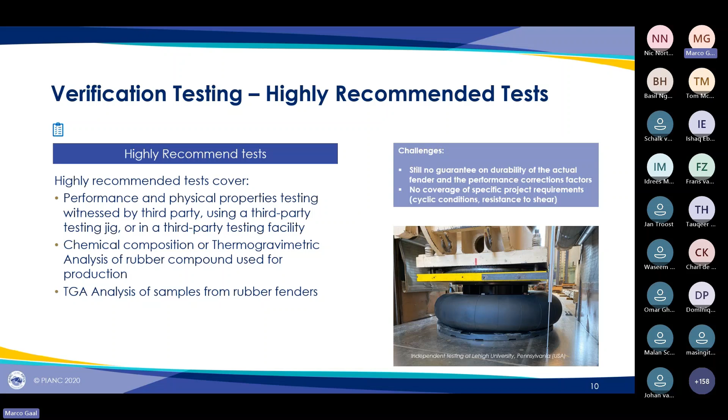Then PIANC suggests some optional tests, which I would consider linked to project-specific needs. As mentioned earlier, there are jobs with cyclic conditions where you might want additional fatigue testing - not durability, but fatigue, which involves much higher cycles. You could also consider shear compression tests, partly to raise the bar of the specification, and for fender systems where shear might be relevant.

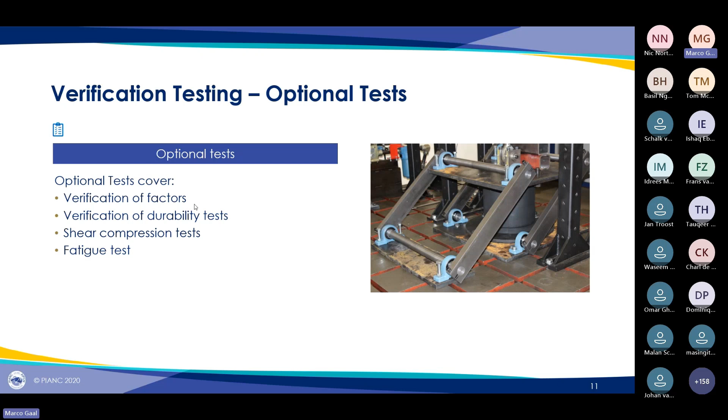You could also ask for durability tests, or ask the supplier to prove their claimed factors for velocity, temperature, and so on.

So when you write a specification and want to specify testing, there are two things you need to focus on. One is type approval testing - you need to require the manufacturer to have done this. However, beware: the guidelines were only published last year, and manufacturers need time to complete all that testing. PIANC suggests a transition period of 2 years from the release of the document for manufacturers to get type approval testing in place, so we are currently in that transition period.

Secondly is the verification testing. If you just say testing in accordance with PIANC, manufacturers will probably focus on the mandatory testing. But as mentioned earlier, mandatory testing might not give you full confidence in the true fender performance, so we really recommend looking into the highly recommended tests and specifying that.

Also, don't write in the specification just 'testing according to PIANC's highly recommended test.' No - the highly recommended test is text in a guideline, and it's up to the designer or specification writer to take those elements and clearly write them into the spec. A spec would say something like 'fenders should be tested by an independent third party' or 'should do TGA testing' and so on. Just referencing the PIANC guidelines in general will not be sufficient.

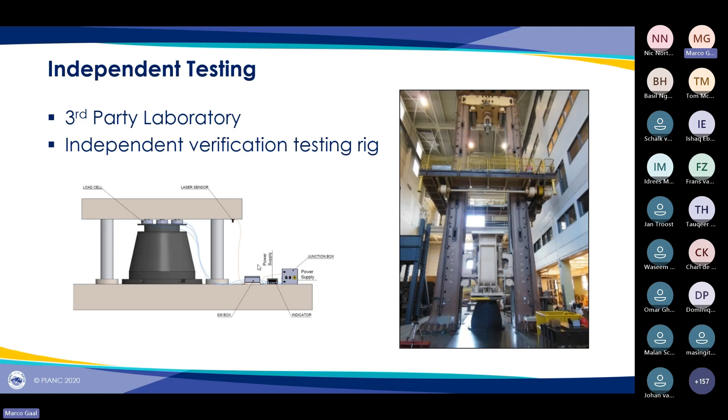Then PIANC provides much more detailed testing procedures. Given the time, I'll go through this a bit quickly. There are procedures provided to determine the fender base performance - obviously that's quite clear - and there are guidelines about what test apparatus and equipment should meet.

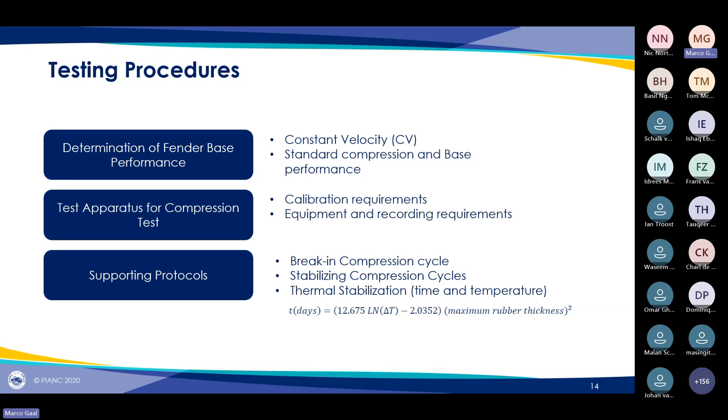There are lots of supporting protocols, for example on the break-in of the fender, the stabilization cycles, and thermal stabilization - which is temperature control of the fender, in simple terms.

Then there's a clear performance testing protocol - a full testing protocol for full size fenders. It explains that we should measure the performance of the fender at the 4th cycle. The reason is that a fender straight from the mold has some additional stiffness, and we need to break in that fender, so we do 3 cycles before actually testing it, which removes that initial stiffness.

Testing frequency needs to be agreed between the manufacturer and the purchaser. If not specified, PIANC suggests that at least 10% should be tested, and of course there's clear acceptance criteria provided for that fender.

Second to that, there is a protocol for a durability test. You as a client, we do that as part of the fundamental testing and the type approval testing, but PIANC is also quite clear that this is something you can do on your project. PIANC describes the conditions for that, describes the frequency of that, and suggests a minimum of 3,000 cycles, and of course the acceptance criteria.

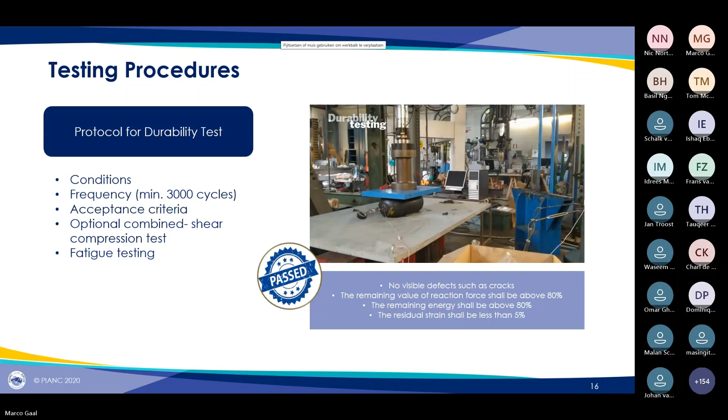In the old guidelines, there was a total lack of clear physical properties for the fender. There were very limited requirements in these guidelines. I believe tear resistance was there and maybe one or two more. But the new guidelines have a full set of physical properties, all in accordance with the latest ISO standard.

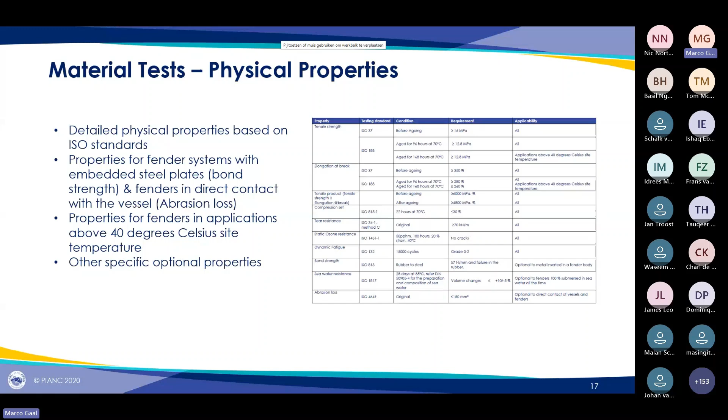You cannot just copy paste this table into your spec, because, for example, there are optional requirements for applications above 40 degrees. There are optional requirements for fenders that are in direct contact with the vessel, but like a cone fender that is not in direct contact, the rubber is not in direct contact with the vessel because it's protected with a panel. So you need to verify which requirement is relevant for your project.

I mentioned earlier that there is TGA testing suggested by PIANC, as a traceability test. And what PIANC, what the TGA or the chemical composition test does, it actually through heating up the sample, certain components are separated by the dissociation temperature. So in other words, with this testing, you can measure what kind of chemical components are in the fender.

And if the compound is of a stable quality, that should be consistent throughout the whole project. So that should be consistent with whatever is being published in the catalog. That should be consistent on the samples that were used for the physical properties testing. And then if you're happy with the physical properties testing, you can use that compound for the production of your fender. And that means that also on the final product, the chemical composition should also be the same. So you can actually take samples from the final product, from the physical properties test, and compare it all with each other.

You can also do the same for the durability test. And the chemical composition is not subject to aging or any point in time of the production process, whether the samples are being vulcanized or not. No, the chemical composition is always the same.

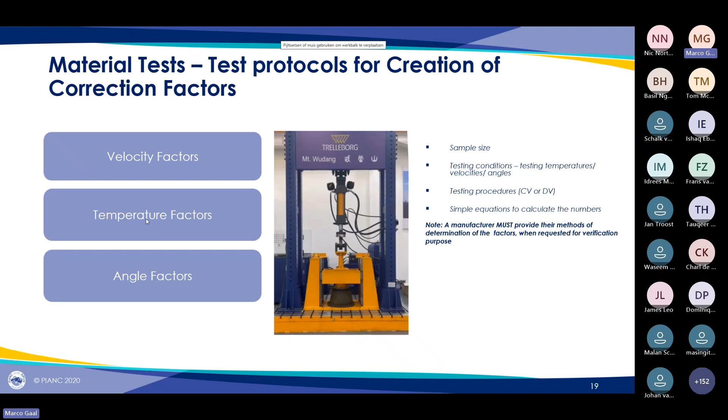PIANC also describes material test protocols for the creation of the correction factors. So it describes how we should develop our velocity factors, our temperature factors, and our angular factor. And last but not least, PIANC describes also the testing details of foam fenders.

So what kind of a foam fender is quite different. There's no time to go in too much depth, but a foam fender is obviously not made from rubber, but it's a polyethylene closed cell foam with a polyurethane skin. So these materials are quite different from what's used in a rubber fender. And PIANC describes what the requirements are for all these materials and also adds details on the testing of these fenders. So yeah, quite a good development for this kind of interesting type of fender too.

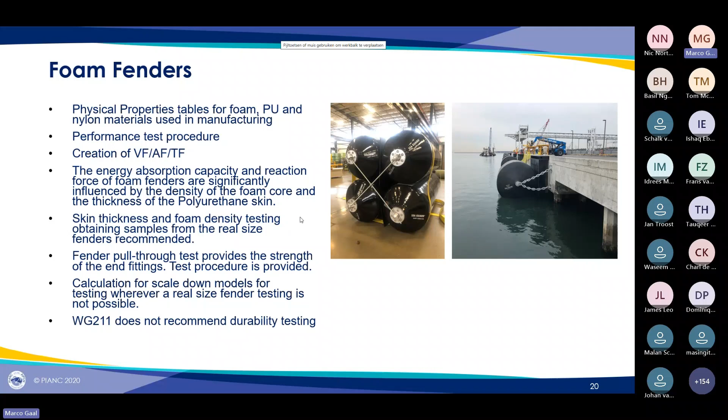And last but not least, I would like to thank everybody for joining us and listening to us. And if you want to know more about PIANC and the guidelines, feel free to go to our website and watch our online webinars. We also have a very simple, easy, accessible document called Flipbook, which helps introduce you to the guidelines instead of reading 200 pages. It's a quick introduction where you can find the information, focusing on the key aspects.

So yeah, that ends my part.